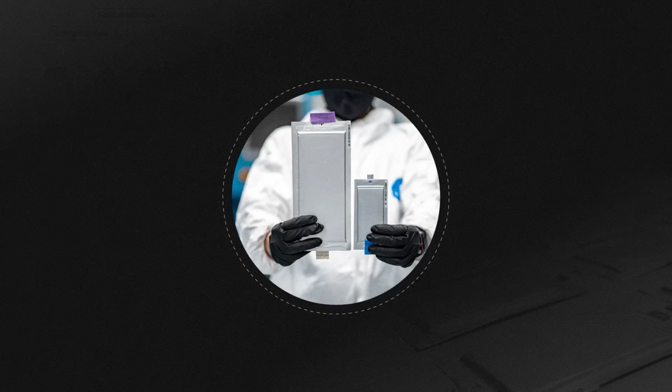They told us solid-state batteries were always 5 years away. Every time we got close, something failed. Too fragile, too expensive, too experimental.

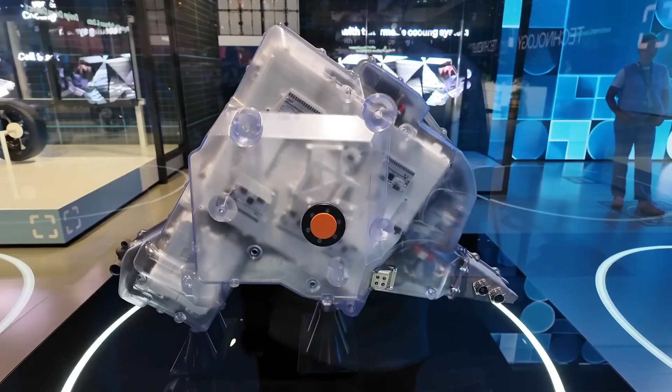But suddenly they're here, inside real cars, real motorcycles, real factories. And yet, not everything you're hearing is true. Because behind the headlines lies a deeper story of breakthroughs, half-truths, and a global race for control over the future of energy.

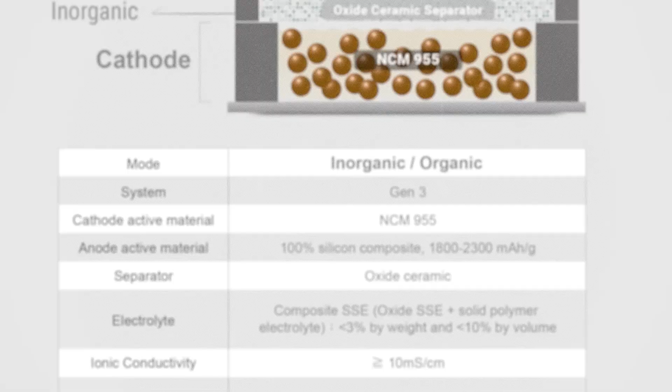For decades, the dream of solid-state batteries sounded like science fiction. Imagine batteries that don't explode, charge in minutes, and power electric cars for over 1,000 kilometers on a single charge. Now, that dream has finally touched reality.

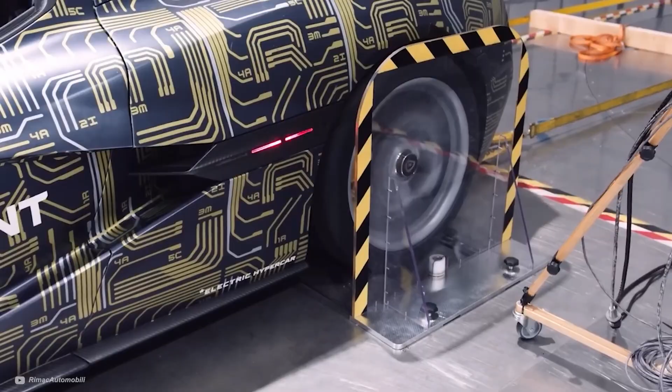From the labs of Mercedes-Benz, Rimac, and Ducati, to the production lines of CATL in China, solid-state technology has left the whiteboard and entered the real world. But is this the future we were promised? Or another overhyped illusion? Let's find out.

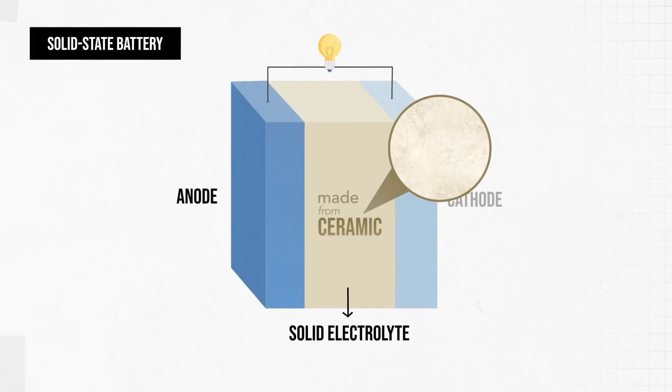There's an old joke among engineers: solid-state batteries are always 5 years away, and for a long time it was true. Every prototype ended in cracks, shorts, or impossible manufacturing costs. The idea was simple: replace the flammable liquid inside a lithium-ion battery with a solid layer, usually ceramic,

that could handle heat, pressure, and higher energy density. In theory, it should have worked decades ago. In practice, the materials just weren't ready.

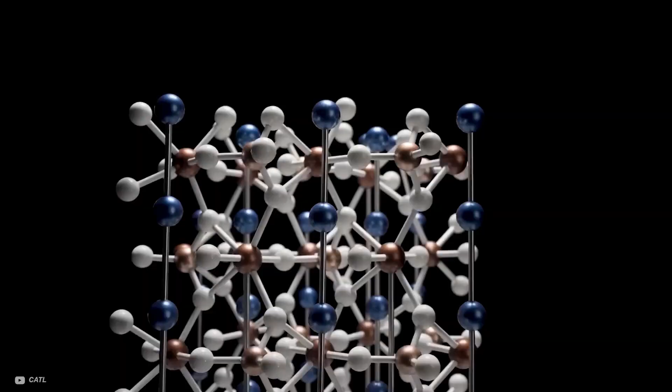But what's changed is scale. Today, companies aren't just building single cells, they're building full-size battery packs, installed in vehicles you can actually drive. That's a game changer. So who got there first?

Three names stand out: Mercedes, Rimac, and Ducati. Each claims to have a vehicle powered by a solid-state pack. And each one defines solid-state a little differently.

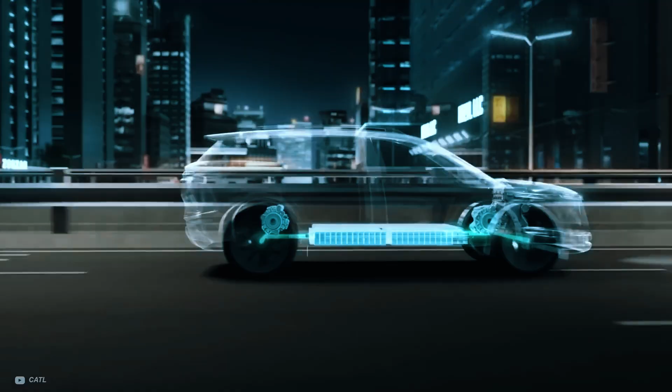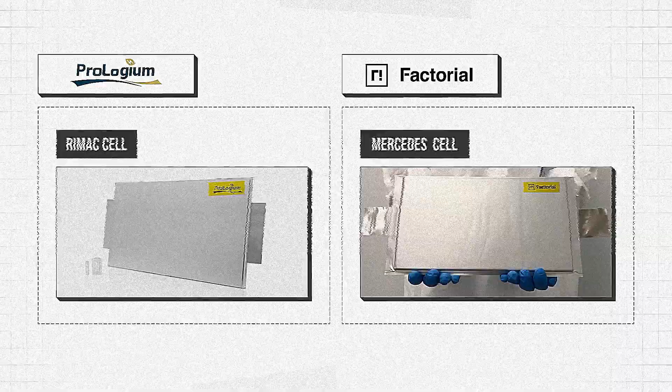Not all solid-state batteries are truly solid. There's something called a quasi-solid-state battery, a hybrid that mixes solid particles with gels or liquids to improve conductivity. It's not 100% solid, but it offers most of the benefits: safety, energy density, and better lifespan. Mercedes and Rimac are both using this quasi-solid approach, and their results are stunning.

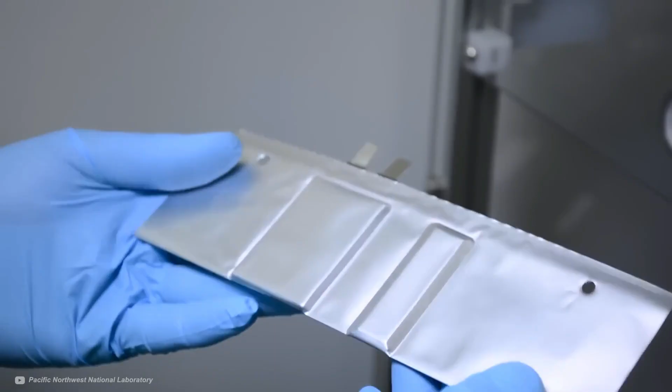Mercedes partnered with a company called Factorial Energy, developing cells with lithium metal anodes and a quasi-solid electrolyte. Their test vehicle is already driving over 1,200 kilometers on a single charge. Same size battery pack, 25% more range. That's an engineering miracle. Inside, the cells reach an incredible 375 Wh/kg, nearly 50% higher than current lithium-ion designs. It's like unlocking a new level of battery physics.

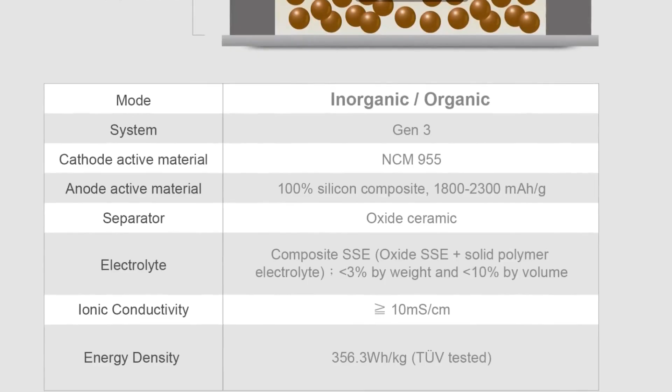But the real secret isn't just density, it's safety. The solid structure prevents those deadly lithium dendrites that can short and ignite a battery. Imagine a world where EV fires are basically impossible. That's the promise Mercedes is chasing.

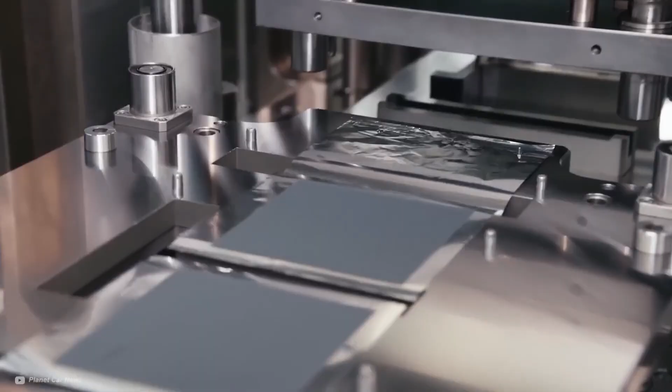Now let's talk Rimac, the company that builds some of the fastest electric hypercars on Earth. Their solid-state pack, built with ProLogium cells, is pure performance madness, charging from 5% to 80% in just 6 minutes. Yes, 6 minutes. That's faster than refueling a gas car.

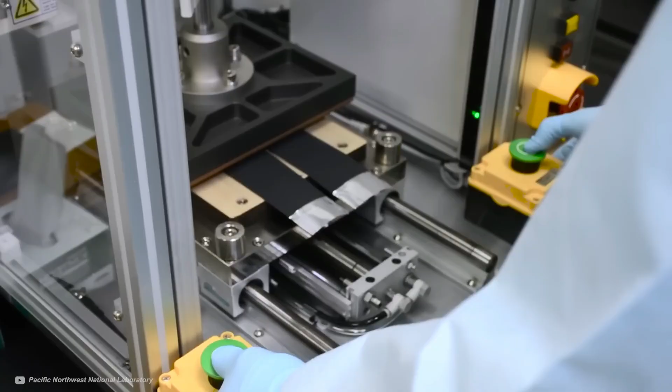These cells use a special silicon composite anode, not pure lithium metal, giving them immense power output while keeping structural integrity. And ProLogium already has a gigafactory in Taiwan producing them, with another one under construction in France. This isn't a concept anymore.

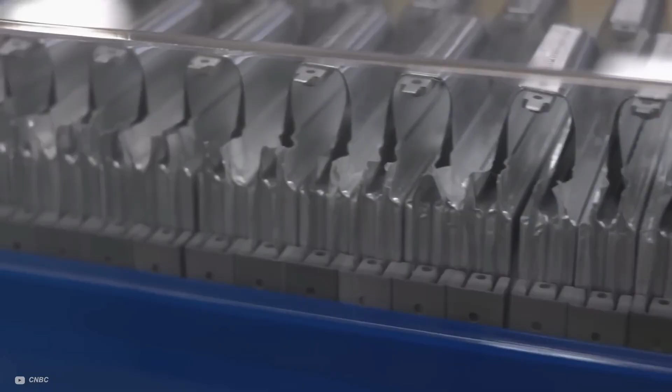It's scaling. And then there's Ducati, a solid-state motorcycle built under Volkswagen's QuantumScape partnership. When it rolled onto stage in Munich, people thought it was just a showpiece. But that bike was running real QuantumScape cells, the legendary ceramic separator with a pure lithium metal anode.

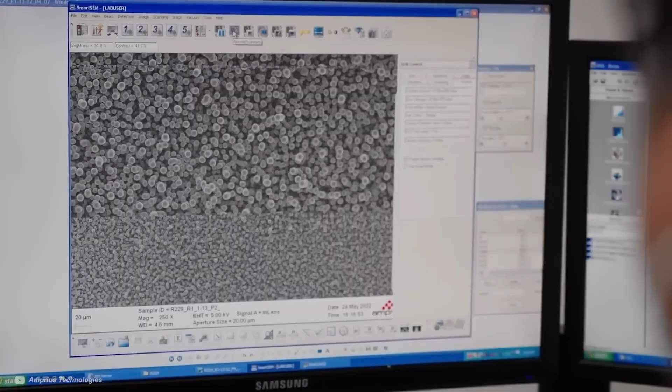These cells grow and dissolve the lithium layer every time you charge and discharge. That's how they achieve record-breaking energy density. It's fragile, it's complicated, but it's real. For the first time, QuantumScape's tech isn't in a lab, it's in a working vehicle.

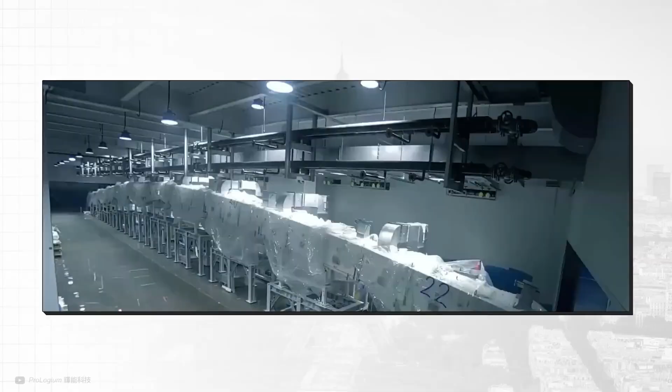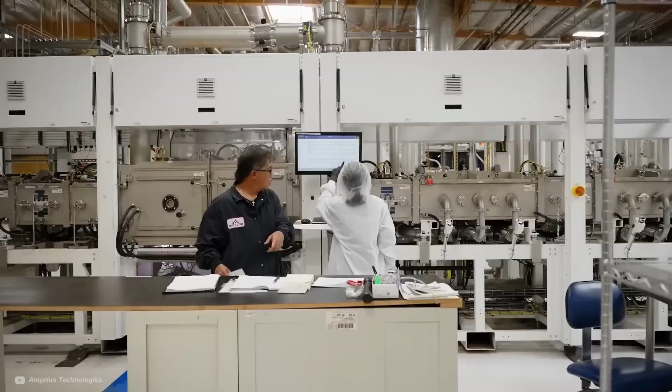That moment changed everything. But as Europe celebrates its breakthroughs, one giant in China is already pushing ahead. CATL, the world's largest battery manufacturer, recently announced a prototype cell hitting 500 Wh/kg, about 40% higher than any Mercedes or Rimac cell.

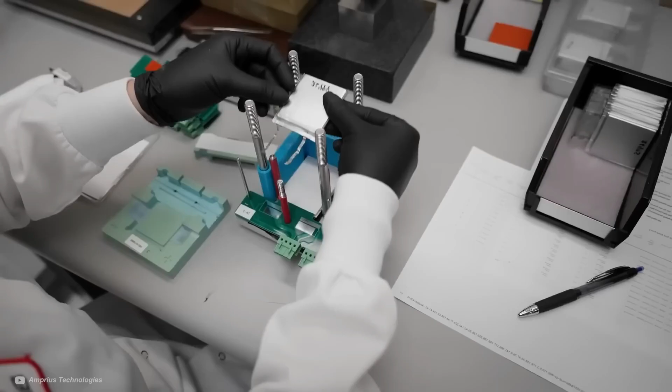That means a standard-size EV could hit 1,500 kilometers of range. Or an electric airplane could actually take flight. The question now isn't if solid-state batteries will change the world, it's who will get there first.

The US has QuantumScape. Europe has Mercedes and Rimac. China has CATL with manufacturing muscle that could flood the world before anyone else is ready. This is no longer just a race for technology, it's a race for dominance.

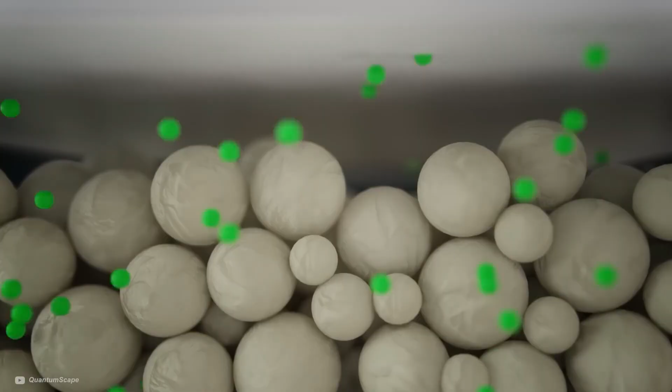Even with all this progress, the road ahead isn't smooth. Mass production is still tough. Solid-state materials are brittle. They need precision assembly, clean rooms, and perfect pressure control. And while these batteries can charge insanely fast, the infrastructure, chargers, cooling, safety systems, must evolve too.

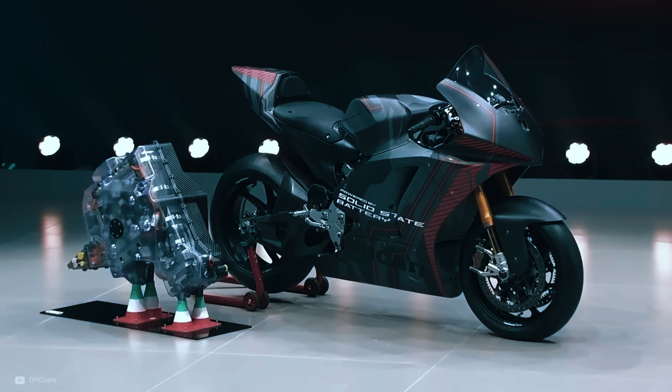But every challenge that used to sound impossible is now in progress. Engineers are redesigning thermal systems, rethinking pack layouts, and preparing factories for a completely new kind of battery. 5 years ago, this was science fiction. Today, it's just science.

The arrival of solid-state batteries means more than just better EVs. It means electric aircraft, ultralight drones, energy grids that never burn out, and medical devices that last a lifetime. We've spent decades perfecting lithium-ion, but now that era is ending. We're entering the solid age, a new chapter where energy density, safety, and sustainability collide.

It's taken decades, billions of dollars, and countless failures, but humanity is finally on the edge of the most important battery breakthrough in history. So what do you think?

Would you trust a solid-state battery in your next car? Or do you think it's just more hype?

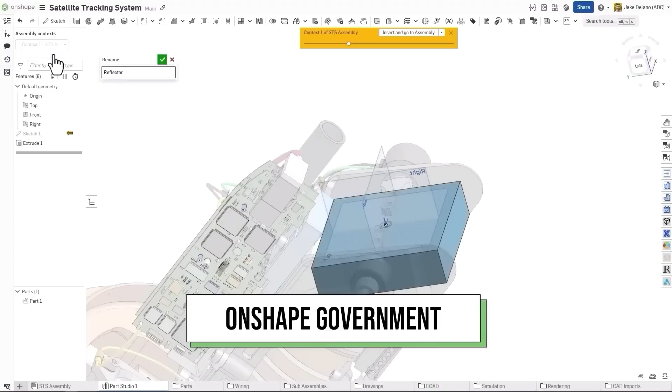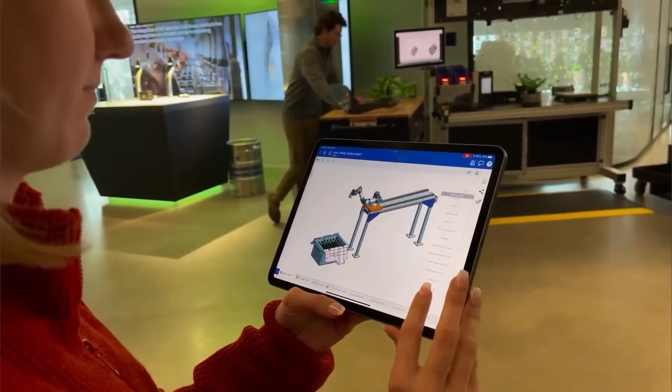Because this isn't the end of the story. This is just the beginning of the solid-state revolution. And trust me, the future is closer than you think.